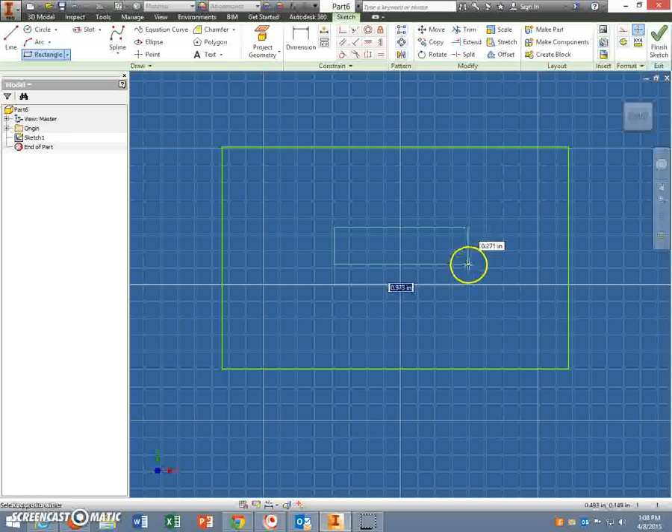You're going to right click dimension, click on the top line of the outside rectangle, drag it up, click on it, and that's going to be 8 inches.

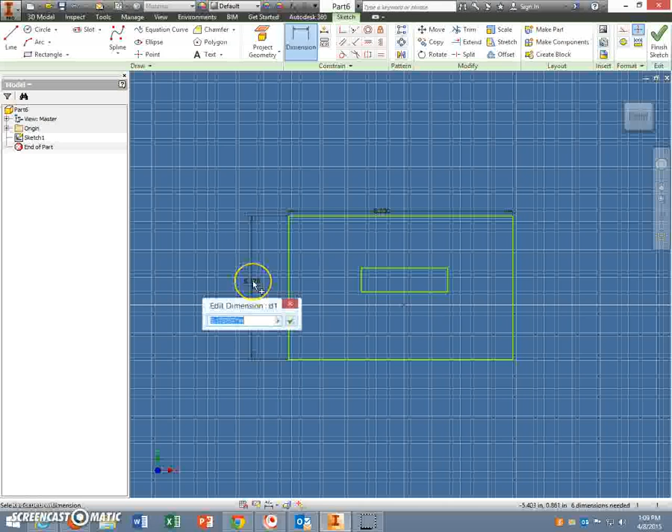You can hit front to get it to zoom back in. The side of the outside rectangle, you click, drag it out, and that's going to be 4.5. And enter. The inside one, the length of it is going to be 3.

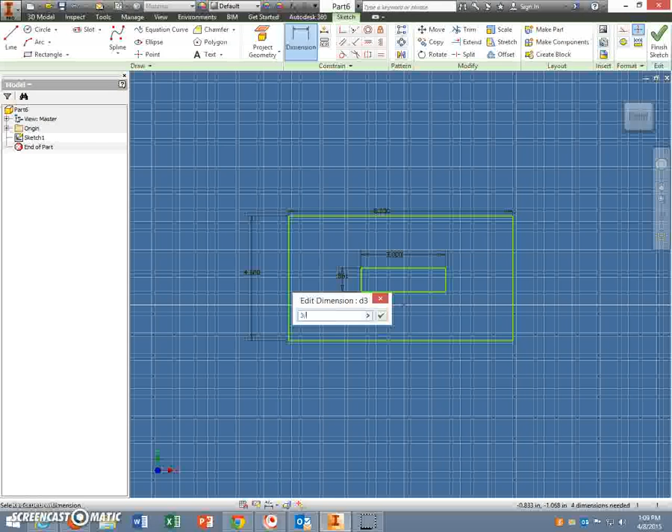And the height is 3/16. Now if you don't know the decimal equivalent, you can type 3/16 and it'll convert it for you. So it's 0.1875 is what it will be.

Now this is all done except for two things. We need to know how far the slot is from the top and how far it is from side to side. So in order to do that, we're on dimension, we click the side one, and then we come in, and you may have to zoom in just so you can see the little piece.

You can't get the dot, but you want to get that little side. So you click that, and then you can move it back in the middle and double click it, and that's going to be 2.5. That's going to slide it over, so now this is centered inside of the outside rectangle. And we'll do the same for the top.

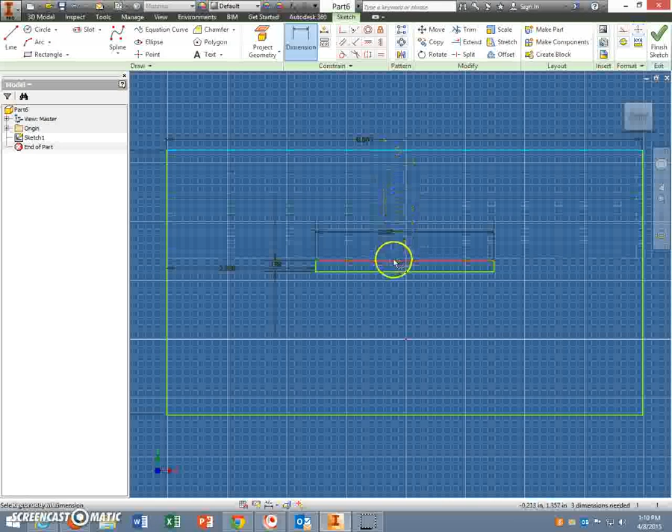So you click the top line, drag it down, click the top of the inside slot, bring it up, double click it, and that's going to be 2.125. And now that's centered this way.

Once we're done with that, you're going to finish sketch. I'm going to put it into the home position, then extrude it.

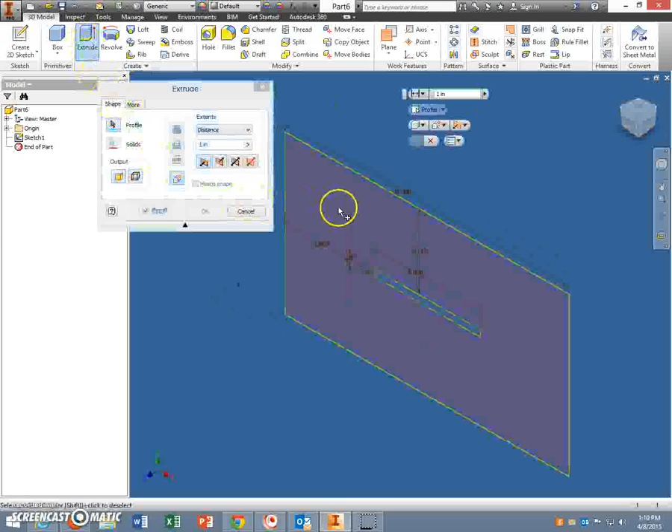All we want is this, we want the slot open, so we don't want to click there. So you click the outside, and this distance is 1/4 inch, or 0.25.

Before we do anything else with it, we're going to run a fillet on it. Fillet rounds the corners over, and we're only going to do it on one side because the other side needs to be flat, and we're going to use the default as 0.125.

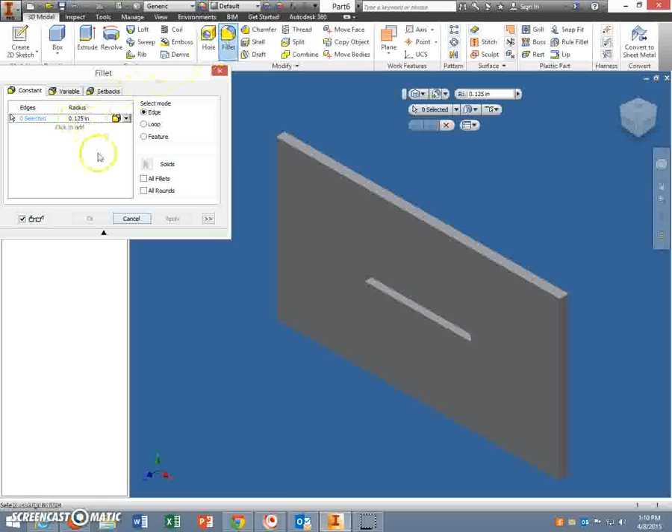All you need to do is click on the top part of your top, and only on the outside. And when you click OK, that rounds those corners over.

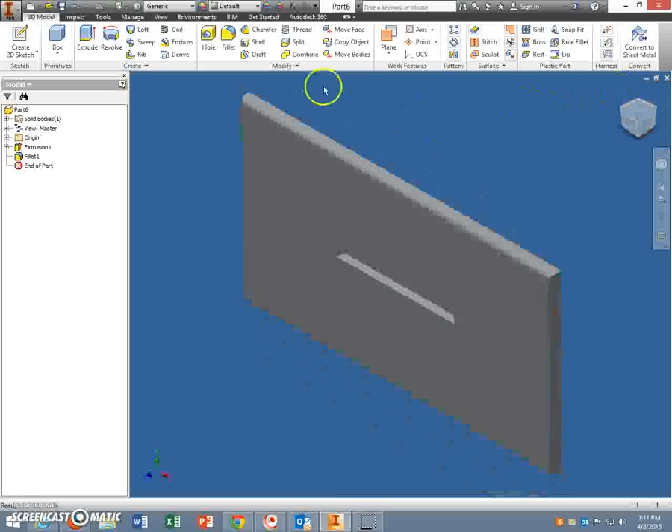So if you look at the right side view, you can see that it's rounded this part over. I'm going to flip this back to the home view, and then we're going to go back and change it to our white oak again.

Once that's done, you go back to save, put it in your class folder. So it's in class CME, Rogers, Tri 3, hour, whatever hour you're in, whatever grade you're in, or whatever your name is. And the file name on this one is going to be top.